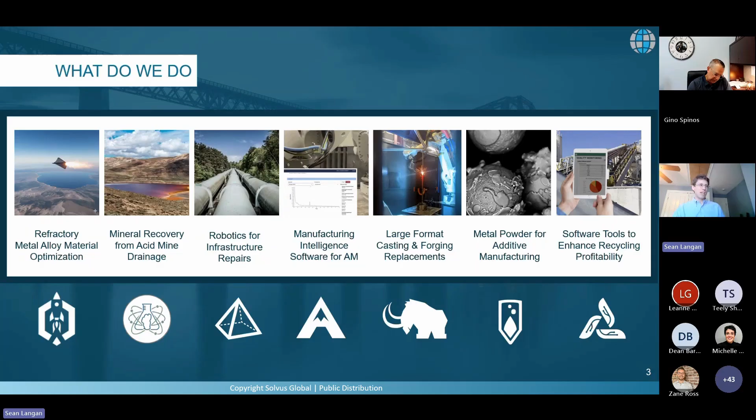It's a fairly large breadth of technologies that we do, and it's a lot of fun to work on. A very brief history of the company.

Solvus was started in late 2017 by Aaron Birt, Sean Kelly, and their PhD advisor, Danielle Cote. The first two years, it really was mostly the CEO, the COO, and a bunch of interns, but we secured our first subcontract award in late 2018 from the Army Research Laboratory to work on cold spray, a technology I'll talk about in a little bit.

I don't want to go too much into this, but our first spin out was in 2022, and that's Valis Insights. Our second spin out was in 2024, Powders on Demand, and that's when Solvus hit over 100 employees. Our latest spin out was, like I said, at the end of last year, Mammoth Metalworks.

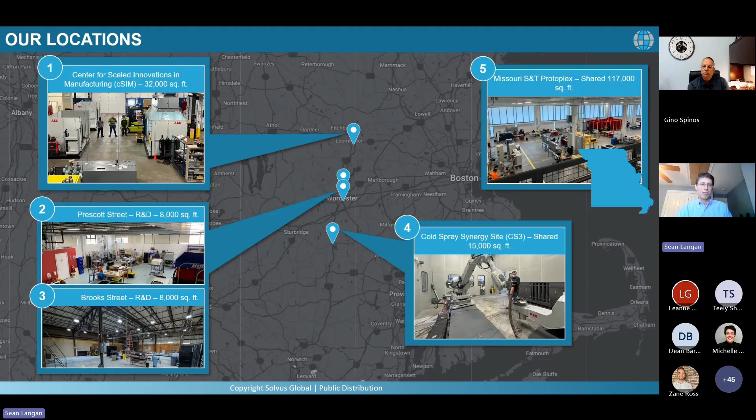We have four locations across Massachusetts covering a variety of technical and business needs. This last year, we also expanded outside of Massachusetts for the first time into Missouri Science and Technology's new Protoplex facility, which we share with them, with Lockheed, and with Caterpillar. It's a really great space.

The first thing I want to talk about today is some of the technologies we have or are developing at Solvus. I wish I could talk about all of them in depth, but because we do so much, that would probably take two hours, and that's a rough thing to do to y'all around lunch. So I'm going to highlight just certain specific ones. If you have questions, there'll be plenty of time at the end, or please don't hesitate to contact me after this—I'll provide my contact details. I will talk your ear off about any of these technologies.

The first technology I want to talk about is our latest spin-out, Mammoth Metalworks. Mammoth creates large format AM parts for things like casting and forging replacements, legacy part replacements, and more.

Mammoth was built to solve a problem, and that problem comes around the manufacture of large metal components. One of the difficulties is how many steps there are in the building process. You have to secure your raw material, then it's shipped to the facility that makes it. It's often then shipped to a facility for rough machining, shipped again for heat treating, shipped again for final machining, then shipped to the final user. And that's if you can actually get the part made at all.

Right now, the casting and forging supply chains in our country are in a fairly tough position. A lot of people are being no-quoted on things that they need, and when they are quoted, it's not uncommon to have lead times of up to two years or more. It's been a real problem, and Mammoth was built to solve that.

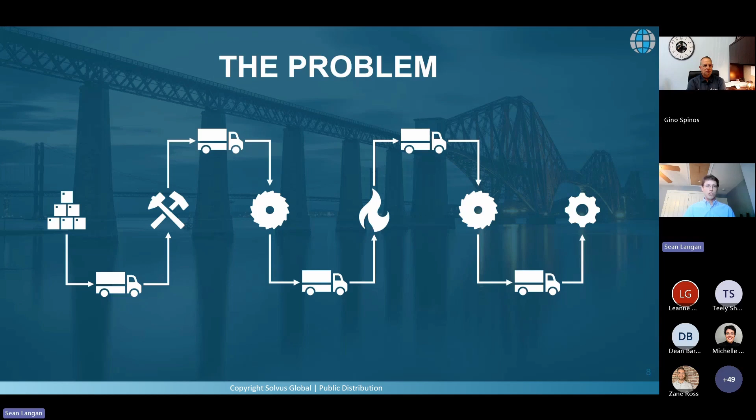We solve that by bringing all of these manufacturing needs under one roof. So under one roof, we can form the part, do first machining, heat treating, finish machining, and then get it to our customer. This allows us to reduce lead times, do things much faster, and do things cheaper, passing those savings on to our customers.

Also, because of the technologies we use, we can take a lot of orders that some of the big casting and forging houses wouldn't be able to. If you have a legacy part that you need three of, that might not be worth it for one of the big casting or forging houses—we can do that for people. We also can do the big orders people want. I'll never say no to that.

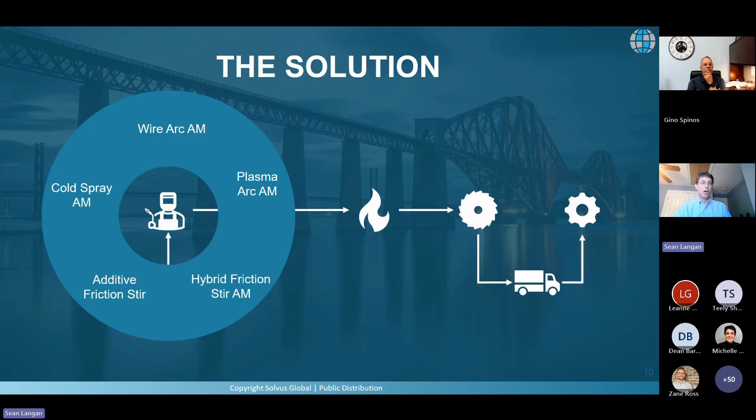Really, the forming technologies we use are all built around additive manufacturing. The three biggest ones we use are wire arc additive manufacturing, cold spray additive manufacturing, and additive friction stir. I'm not going to go too in depth into these technologies—if you have questions about them, please talk to me anytime, happy to talk to you about it. But there is one I wanted to show, if only because it's a really cool video.

This is something called additive friction stir deposition. It's built upon the background of friction stir welding. Basically, what you do is push material through that nozzle, and by applying enough pressure and heat, you can cause that material to flow out, and you can stack layer on layer with it.

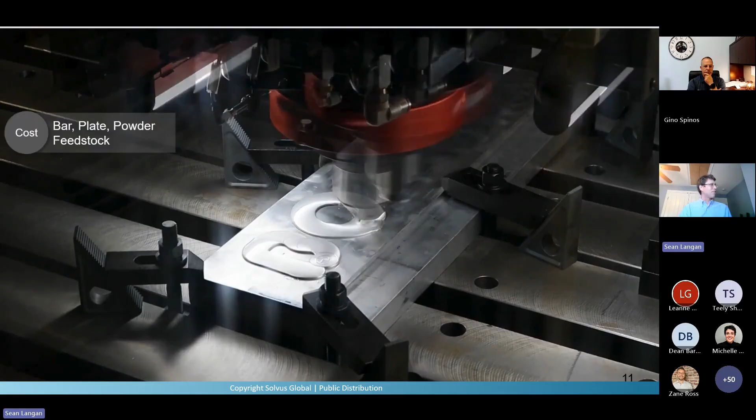It's nice because it is a solid state process. You don't have melting, so you avoid some of the heat affected zones and other problems that you have in melt-based processes. It's a low cost technology because the feedstock, we have a lot of feedstock choices in what you put in before you get your final part.

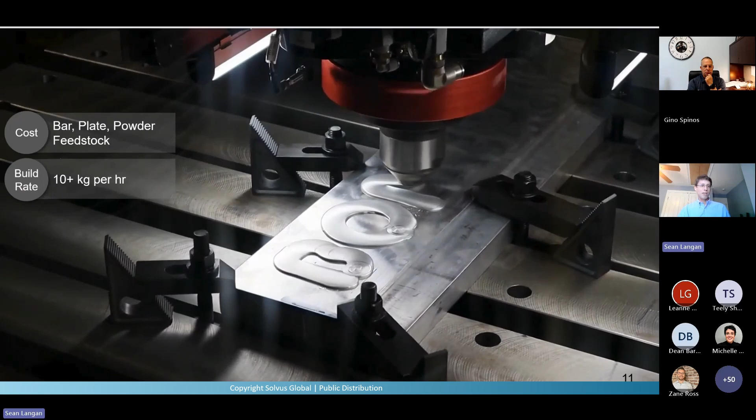We can do bar stock, we can do plate stock, or we can even do powder. It's got a really high build rate. 10 kilograms per hour is fairly easy to hit. There have been people who've been able to hit up to 100 pounds per hour. And fast build rate results in lower costs.

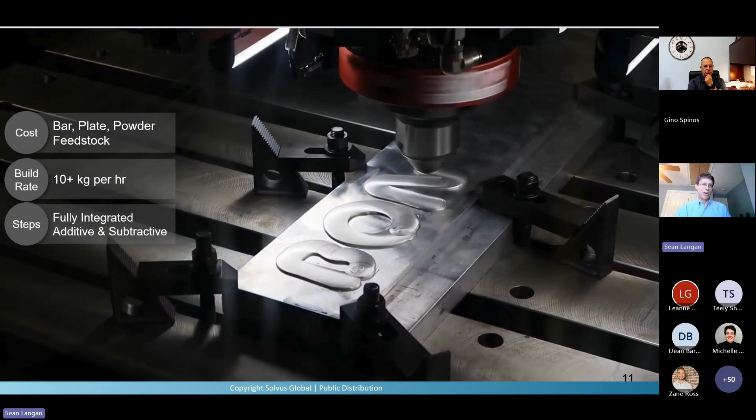One of the nice things about these machines is they're fully integrated with additive and subtractive. You can do both of them. And last, the nice thing about it is because you're doing a thermomechanical process on this, you can get forging-like properties with it.

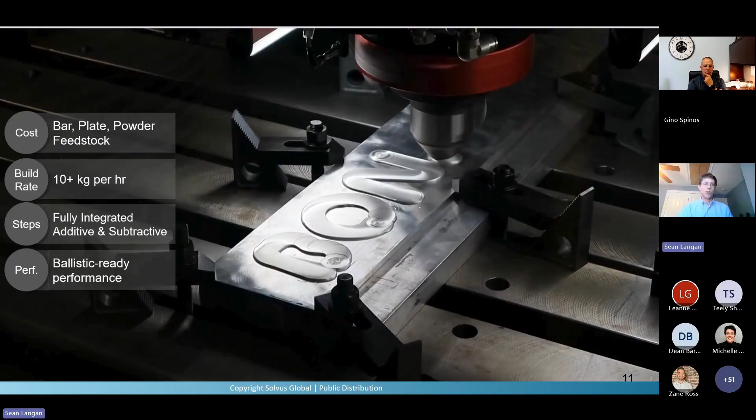And I noticed I have a hand up. Jim, can I answer a question for you? Yeah, hey Sean. How are the loads in friction stir additive compared to friction stir welding? Are they much lower because you're not plunging into the material?

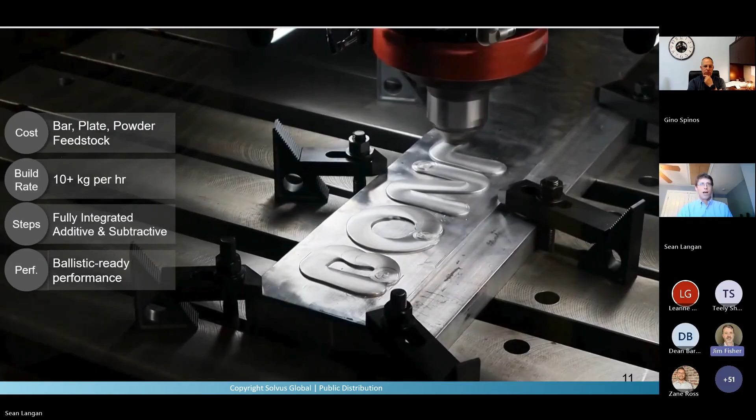Yeah, they can be lower. I've seen everything from 6 kilonewtons up to 20 kilonewtons of force. So you still have to clamp it pretty well as you're doing the process. Oh, absolutely. We've taken to often putting threaded holes into our substrate and bolting it directly to the anvil. Got it. Thank you. No problem, happy to help.

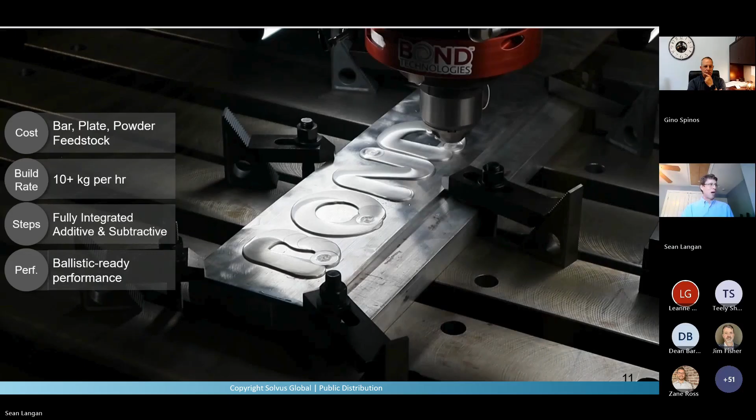With these technologies, like I mentioned, friction stir, cold spray, and wire arc additive manufacturing, we can do a lot of different materials with them. One thing we do is we don't shackle ourselves to only one manufacturer of these additive technologies. We frequently will have systems from multiple competitors because one company may do one thing well and their competitor may do something else well. I'm a big believer in square peg, square hole, and usually if someone's trying to talk to you about a silver bullet, it's because they're trying to sell you something.

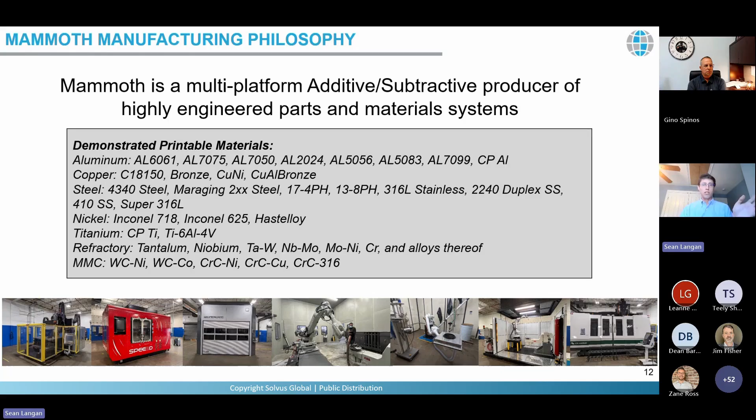I actually have a transition story about that. At Solvus, we really focus on transition. We're not an SBIR shop. We want to build technologies and get them out the door into people's hands. And here I've got an example of this.

There was a missing part that was holding up a really critical anti-drone technology demonstration for the AFRL. And the existing supply chain wasn't letting them get the part when they needed it. They needed it within 6 weeks, and they were quoted 24 months, if I recall. So they came to us and said, 'Can you help us out here?' And we said, 'Absolutely.' The problem was it was material we'd never worked with before. But within 4 weeks, we were able to go from process optimization, that's laying down your first welds, to getting material properties and tuning material properties to ensure that they were going to be what they needed to be.

And we were able to go from the CAD to the finished part. This printed part was printed in 20 hours. It was 120 pounds printed. We were able to finish and test the part. It was able to perform successfully one full step up above the pressure requirements it had. So we were able to go from concept to finished part to deployment in 4 weeks, and the part was successfully pressure tested to 180 psi, when the requirement was only 120 psi. And this allowed for an on-time demonstration of the system.

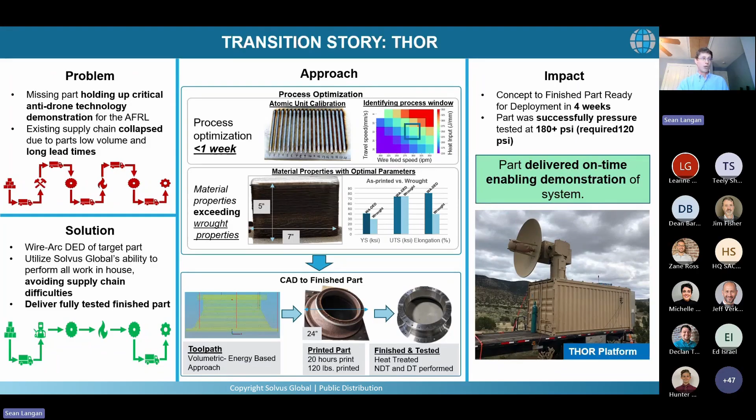This is the kind of work we do fairly frequently at Mammoth. There's a lot of things I can't share here that I wish I could, but always happy to talk to people about it.

The second technology and spin out I want to talk to y'all about today is Powders on Demand, which provides customized, high quality powders for additive manufacturing.

Before we get into Powders on Demand, we very quickly need to talk about cold spray. Cold spray is another additive manufacturing and coating process. What it does, if you're not familiar with it, is it takes metal powders and accelerates them at supersonic velocities. When they hit the substrate, they bond to it, forming a metallurgical bond. It's a solid state process, so there's no melting. You maintain your microstructure from beforehand, and there's very low heat affected zone. So there's a lot of real benefits to it.

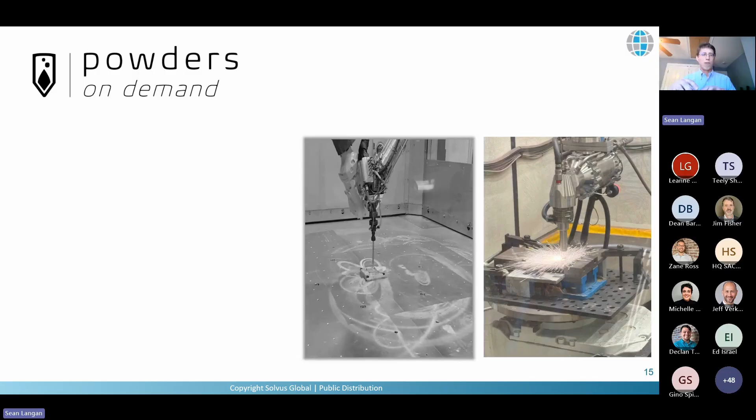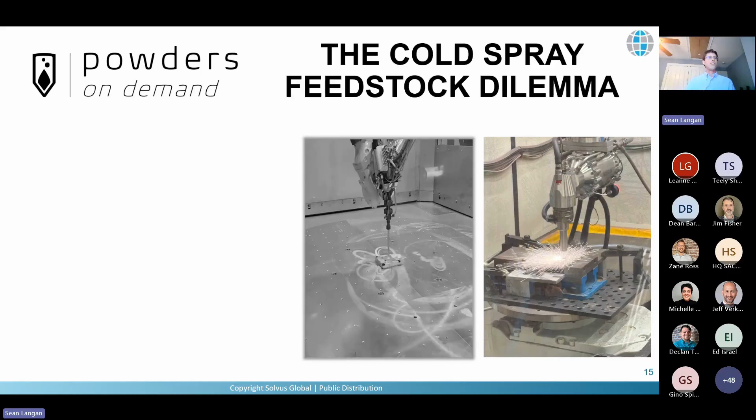In the early days of cold spray, people were really excited about the technology. The problem was when they went to their local atomizer, bought powder, and threw it in the system, they didn't get the results they were looking for. They often found nozzle clogging, where the powder is deposited in the nozzle that it's being sprayed through, as opposed to on the substrate where it's supposed to deposit, and poor material performance from things like inconsistent bonding and delamination, porosity, low mechanical properties, etc. This led to a lot of people not trusting the new technology despite its promising features.

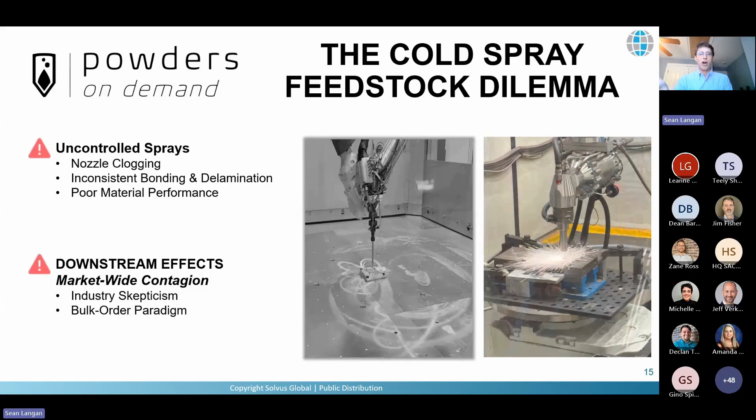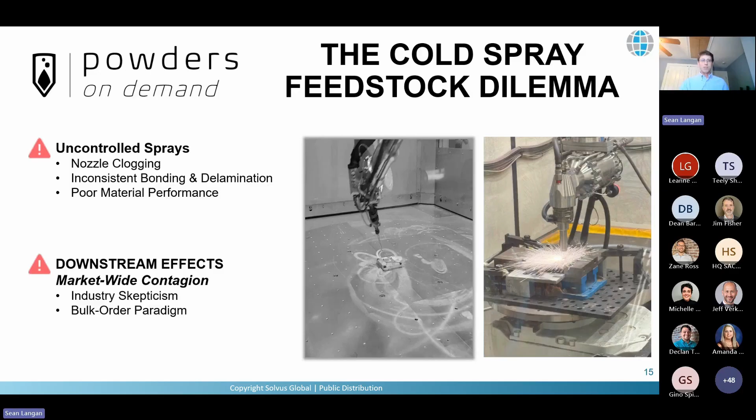And those who did trust the technology often found themselves in the quote unquote bulk order paradigm, where traditional suppliers demanded multi-ton minimum orders, starving researchers and locking out smaller scale companies from being able to use this technology. Powders on Demand was born to solve this problem.

Powders on Demand engineers powders specifically for cold spray and for additive manufacturing. After we have developed the materials, we make sure it's tested. We guarantee deposit reliability. If you buy powders from us, we'll give you the recipe for the feeds and speeds for how to deposit it and how to get the kind of material properties you need. We'll tell you what the heat treatment is if you need it. We'll do all of that for you. This allows people to use cold spray in a way that it hadn't been done before, and it's really grown very quickly.

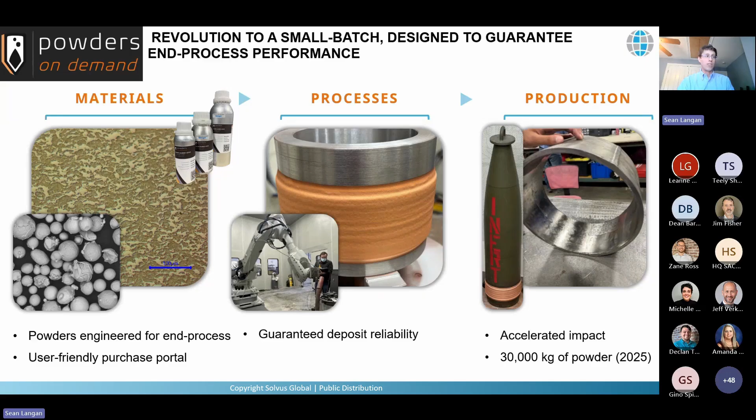Last year, Powders on Demand produced and shipped 30,000 kilograms of powder.

At Powders on Demand, we have a lot of different techniques we use to modify powders to make them appropriate for cold spray, be it mechanical processes, thermochemical, thermomechanical, or chemomechanical. We make custom powders for people and make sure it's going to have the performance that they need.

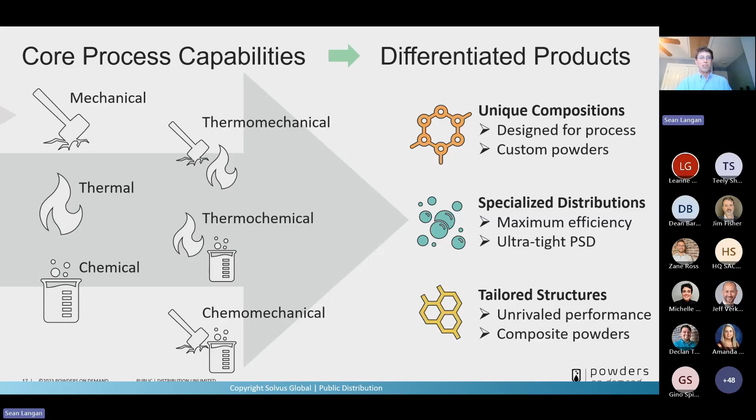I have another transition story about this one. There was a problem that a lot of naval ships are having with maintenance. Dry docking these vessels can cost anywhere between $100,000 and $1 million per day. Cold spray repair, though, is a really great solution for this. The repairs can be performed shipboard, reducing downtime and increasing asset readiness.

We've developed powders specifically for repeatability in these repairs. We do an application-specific development. We start with the feedstock engineering, move on to spray optimization, testing and characterization, and we also qualify the powders for transition. These powders are qualified to the mil spec. We have national stock numbers, or NSNs, on a lot of these powders to make it easier for people to apply them to their needs.

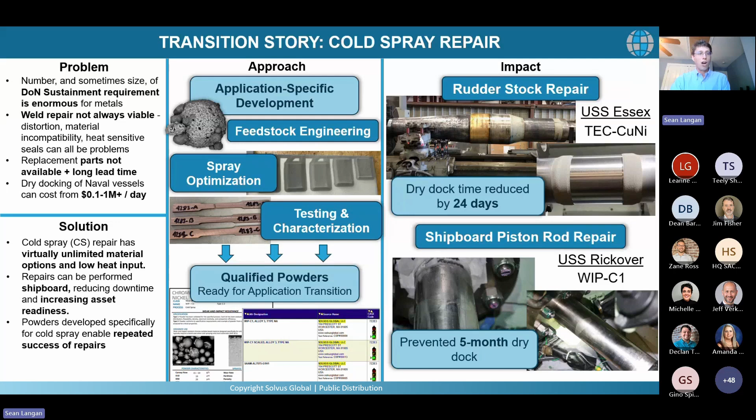And the impact of this has been really great. On the USS Essex, dry dock time was reduced by 24 days. On the Rickover, our powders were used and prevented a 5-month dry dock. At the cost of $100,000 to $1 million per day, this results in really significant savings and improved readiness.

Next, another of our spinouts, VALIS, was created. This is our first spinout to make metal recycling more profitable by optimizing and controlling sortation quality.

Scott, I have a question. What can I do for you, Scott?

Before you move on with your powder manufacturing, are you doing any kind of powder flowability testing? I know you're using it for cold spray applications only, but from the perspective of additive manufacturing, are you doing flowability testing as well with the powder that you're manufacturing? Yeah, we do flowability testing on all of our powders, and we use some standard flowability measurements, and we do non-standard ones that we've developed in-house as well.

I've got a paper on it I can send you if you want, that I wrote. But we do a lot of that, because like you said, for any AM technique, it's really important.

Yes, we may want to have a follow-up conversation. I have another project I'm working on with a company, United Protective Technologies, and they're looking at coating powder to provide better flowability. I don't know if that would apply to what you need within cold spray, but it's a potential collaboration. We do coated powders as well. Happy to talk to you about it. Yeah, I'd like to have a follow-up. Thanks, Sean. No problem.

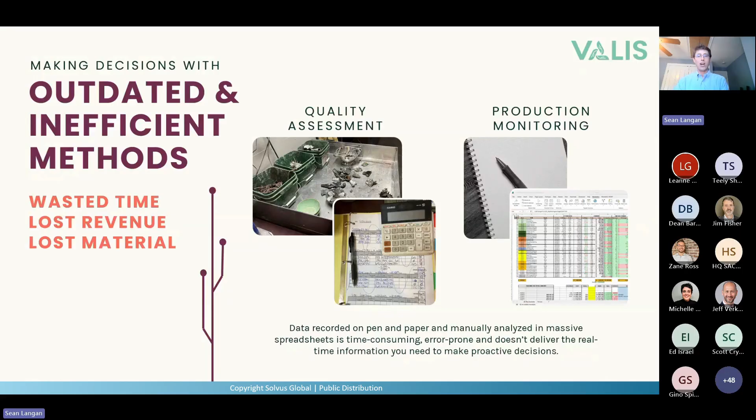Many of the methods currently used in the scrap recycling industry are outdated and inefficient. Quality assessment is done on a really limited basis—sometimes it's just one Home Depot bucket worth of scrap tested for a 2-ton order, using pen and paper to record it. A lot of the planning and monitoring work is done on huge spreadsheets made years ago, and all of this is prone to error and can't change quickly as needed in the modern world.

VALIS has developed modern solutions to these problems. To name a few, we've got Vali-Sample over here—it's an integrated hardware-software tool to replace manual data capture. And over here we have Vali-Sort, a digital twin that captures data across operations to deliver the right information at the right time.

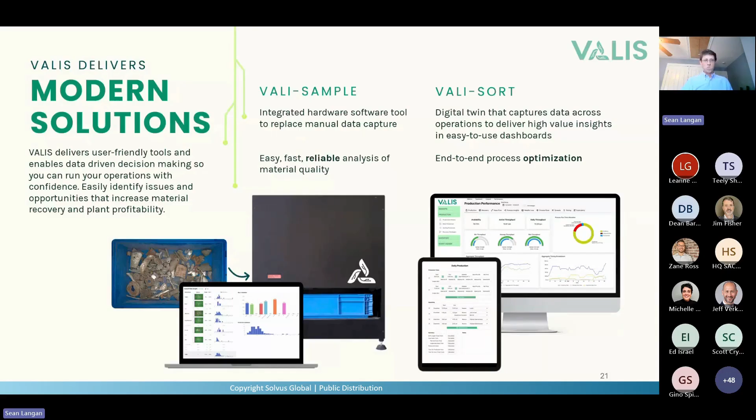One of the great things it does is provide real market data so that scrap sorters can determine the most profitable mixture for them to sort to, so they can get the best results for their money.

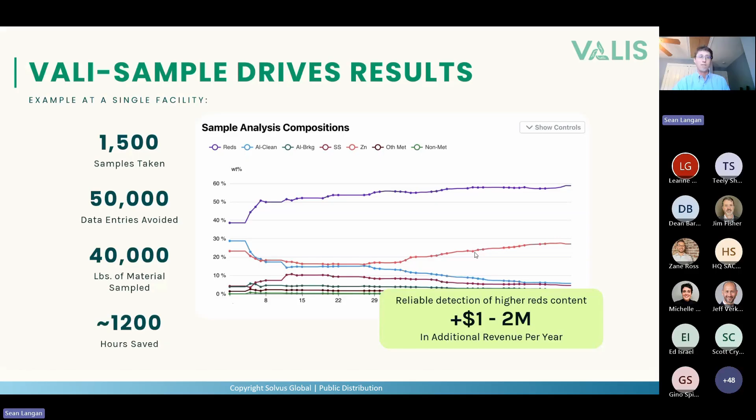The last technology I want to talk about hasn't spun out yet, but it's something we're growing at Solvus and hoping to spin out very soon. This is rare earth recovery—extracting valuable resources from waste streams through electrochemical methods. We've developed a really great vertically integrated technology stack at Solvus that covers all aspects of this.

On the software side, we have a materials search agent and a geographic information system that allows us to find the best opportunities across the country for this kind of waste extraction. It was a fairly large effort to get this software working, and it's working really well.

Once we've identified the proper places, we can do acid mine drainage extraction. We can do the separation, the metallization, and the purification all at Solvus. And then it circles back around to the software at the end for fully supply chain orchestration.

Gino, I see a question from you. What can I do for you? Yes, Sean.

Where in the US is the majority of the best areas for this type of technology? Because there's a lot of acid mine drainage in this area—Pennsylvania, West Virginia, Eastern Ohio, et cetera.

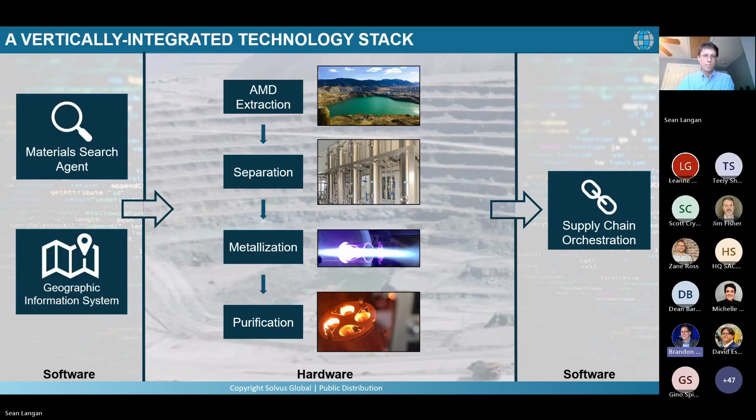And then on the conversion side, when you talk about some of those processing capabilities, are you doing thermochemical processing, or are you doing things like electron beam furnace operation, VIM-VAR? I guess what's the extent of what you have within your organization in terms of conversion? Once you get the ore out, or the raw ingredients out of the ground, what's the breadth of your capability? Because I saw niobium, so that immediately suggests you have electron beam furnaces - you're doing that and then some. I don't know if you're operating the Kroll process. Can you talk a bit about that, just so I understand your organization better?

Yeah, absolutely. So most of the extraction is done electrochemically. Once that's done, we have a lot of plasma-based capabilities for the metallization, but we can also do what you talked about with the Kroll process. Okay, all right, that's helpful to know. Thank you. No problem, all right.

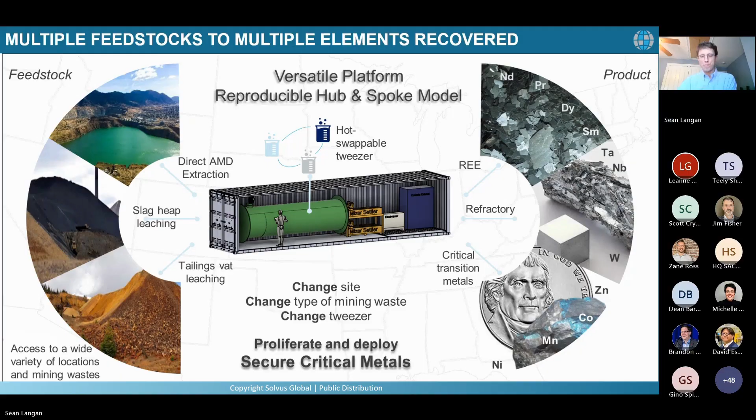Moving on, I wanted to talk about what really drives this work, and that's the partnerships and the people. I really believe that nothing great is ever done alone, and that you need a really good team to get the work done.

At Solvus, this often looks like having engineers from across multiple disciplines. It's not just materials engineers, it's software, mechanical, electrical, and chemical as well.

We have a lot of people within the government who we can call, we can pick up a phone, we can get the questions answered, we can know who we need to talk to. We have the academic and industrial partners that if we don't have the capability, they can handle it. And we can use this to build up really great teams when we need to.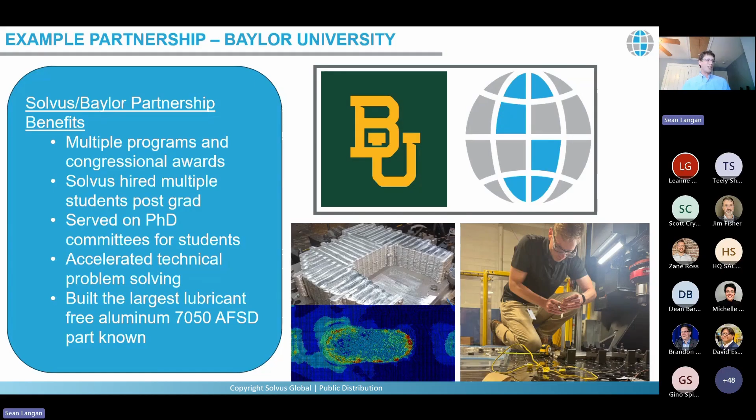We're also very good at team building. There was a call that y'all released a year and a half, 2 years ago, NCDMM, and in 4 weeks, Solvus was able to go from putting the team together, acquiring letters of support from RTX. Oh, and the team is Solvus, RTX, Penn State, the AFRL, and Powders on Demand.

We were able to acquire letters of support from RTX, Dynetics, Northrop, and PEO Soldier. We wrote the proposal, then we won the proposal with $6 million, and the work is underway right now. The work that we're doing is on new solid rocket motors using additive manufacturing to produce them so that they can withstand higher temperatures and have kind of a greater customizability.

It was really great that we were able to do this in that kind of short amount of time, and we've done that many, many times over.

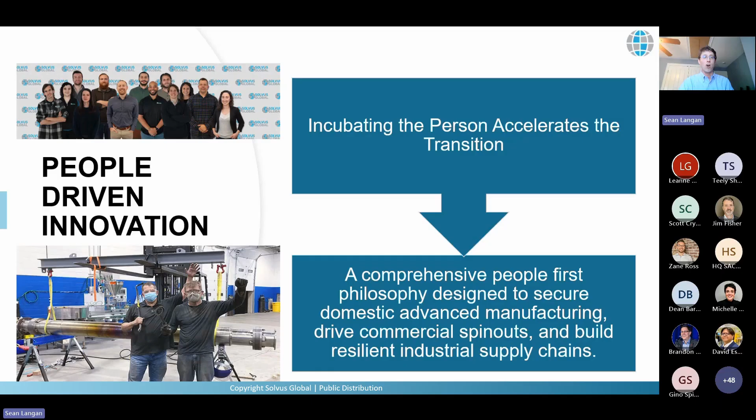While these partnerships are incredibly important, arguably more important is the people within Solvus. The most valuable resource we have by far is our people. We work very hard to make sure they can grow and be successful at Solvus, and I have a couple of quick examples of that.

The first up is Emily Molstad. Emily joined Solvus in 2018 as an intern, and by 2022, she was the CEO of Valis, our first spinout. Emily works really hard, she's really good at what she does, and we made sure that we could help her grow when she needed and get out of her way when she needed it too. She's doing really well. In 2024, she was named to one of Forbes 30 under 30, and her company is doing very well right now.

And this isn't kind of a lone example here. I wanted to talk to you all as well a little about Nicholas Goy. He's a mechanical engineer at Solvus.

He joined in 2022 as an intern through the Mass CEC program, and in 2023 was hired full-time as an engineering technician. In 2024, he advanced his career to become a mechanical engineer. Then in 2025, he became the project lead for the very project that had hired him as an intern a few years earlier. Nick worked very hard, was very open to feedback, and grew really quickly because of it. We love Nick, he always has a smile on his face, a really down-to-earth guy who connects with people very well and does great work.

These technologies that we've developed are only possible because of being able to grow people. We take that really seriously. The keys to professional growth, some of them we found, is mentorship. We have some really robust mentorship opportunities within Solvus. And growth opportunities - we want people to be able to grow as much as they can, as fast as they can.